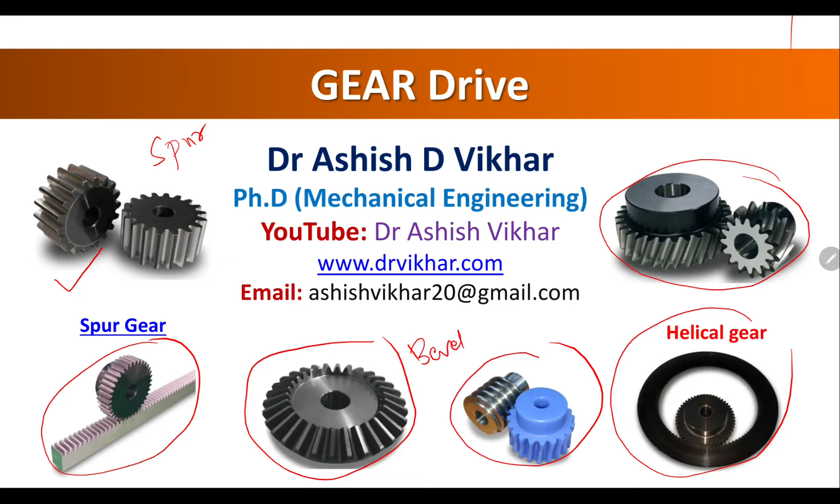Here you will see a bevel gear. After that, this is a worm and worm wheel. After that, here is an internal helical gear, and these are the helical gears. So this way there are various types of gears available, and all these gears are used in power transmission.

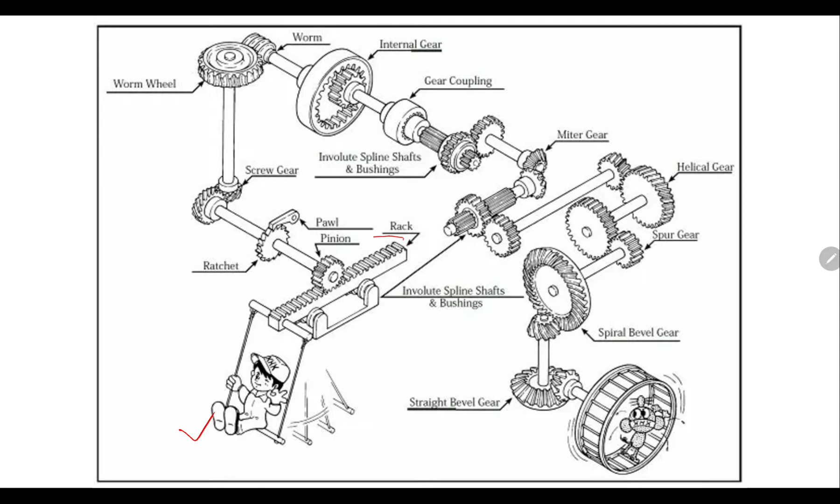This is a very important picture. You will see the applications of various types of gears in one place. As you can see here, this small child is on the cradle, a baby swing, and that is attached to the first type of gear here, which is called a rack and pinion gear. The power from that is transmitted to another mechanism called the ratchet pawl mechanism.

Further, you will see an application of screw gear. After that, the power is given to the worm and worm wheel. Through the internal gears, that power is given to the gear coupling, through gear coupling to involute spline shafts and bushings, and from that place it is given to the miter type of gear.

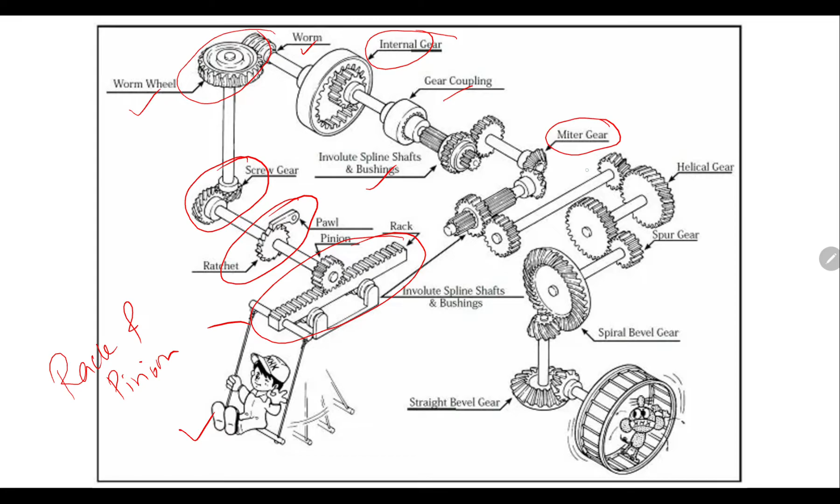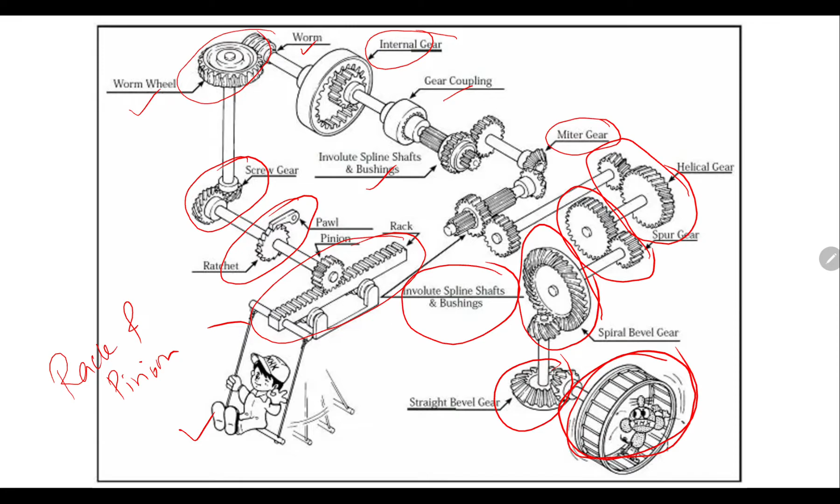From the miter gear you will see again the power is given to the involute spline shaft and bushings, and from that there is an application of helical gear. Then the power is given to the spur gear. Then you will see spiral bevel gears and straight bevel gears, and finally at the end you will see the power is reached. So this is a very beautiful figure which explains the applications of different kinds of gears.

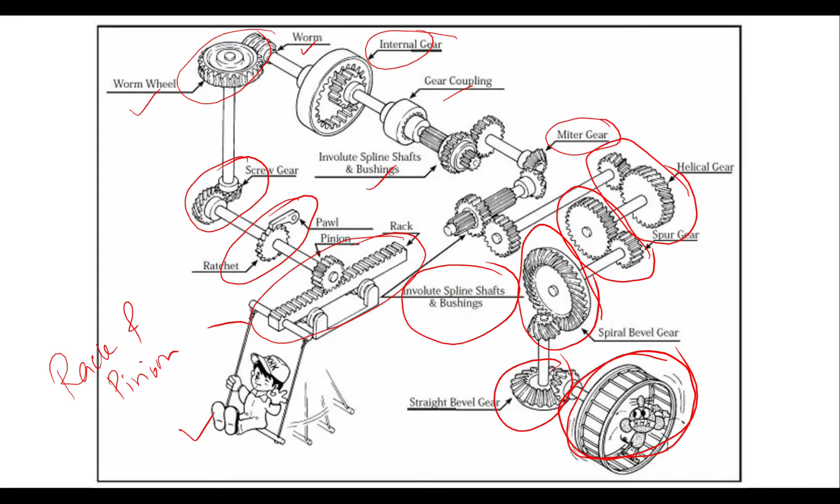We have to understand how the gears rotate, how is the structure, how is the appearance of such types of gears, that we are going to learn in this unit. But let us see what are the contents of this chapter number 4 of theory of machines, which is based on the gear drive. First we will see introduction to gear drives.

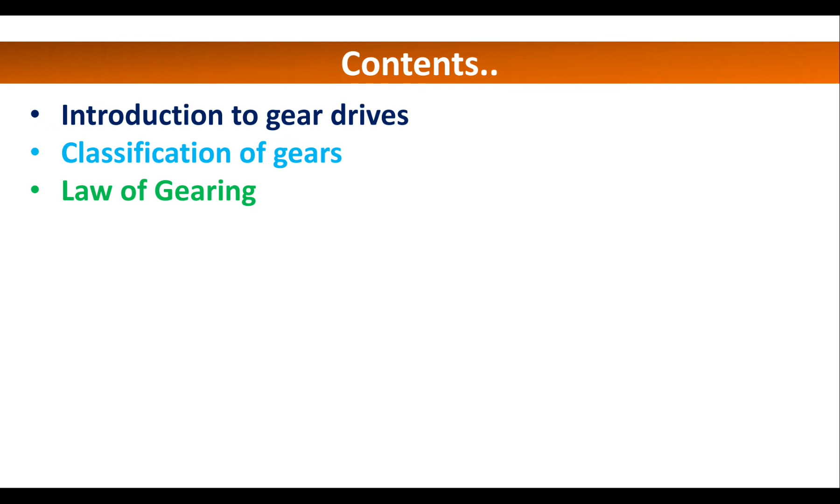After that we will learn about classification of the gears. Next we will learn what is the law of gearing. This is a very important law in case of gear drives. After that we will learn gear terminology. Then what are the types of gear trains, the different types of gear trains.

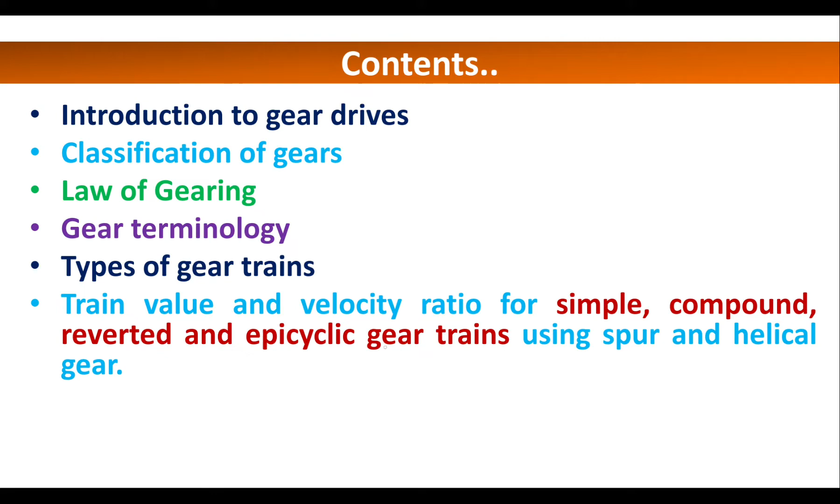Then we will learn about train value and velocity ratio for simple, compound, reverted and epicyclic gear trains. First is simple gear train, second is compound gear train, then third is reverted gear train, and last one epicyclic gear train. Then how to determine the velocity ratio regarding all these types of gear trains, using spur and helical types of gears. So that we are going to learn in this chapter number 4.

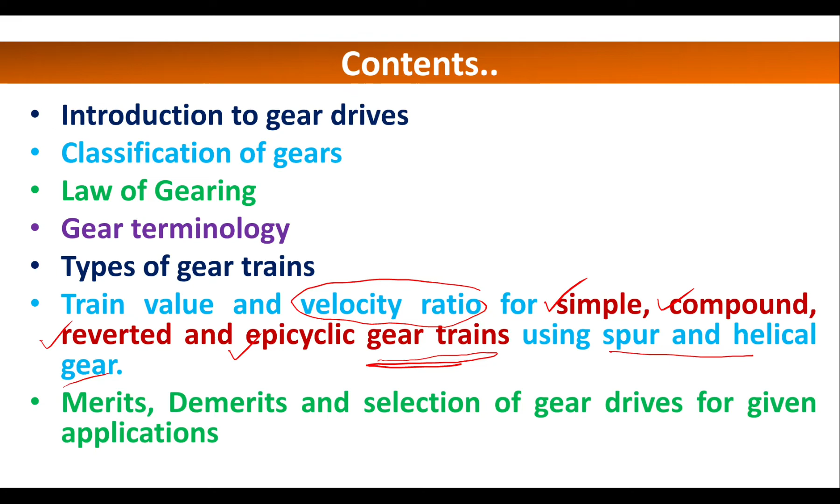After that we will learn about the merits, demerits and selection of gear drives for the given applications. So these are the total contents that we are going to learn in chapter number 4, but particularly in this lecture we will only learn about introduction to gear drives. So what is meant by gear drives?

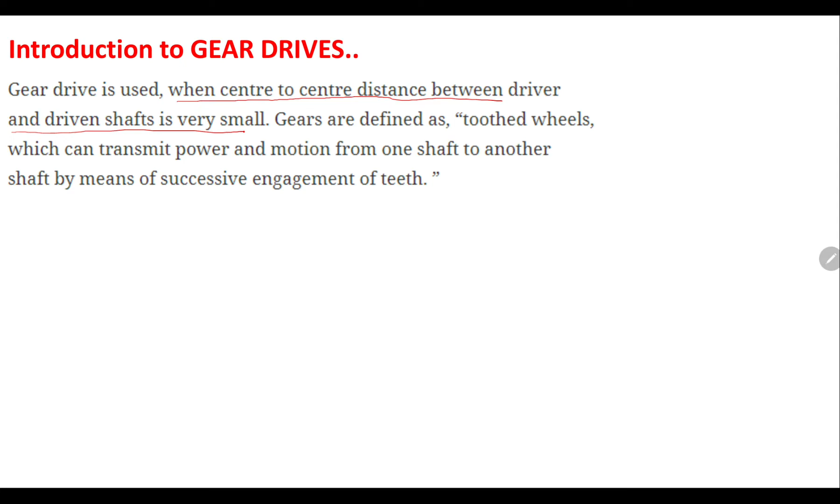Gear drive is used when the center to center distance between the driver and the driven shaft is very small. So when the center to center distance between the driver and driven shaft is very small, we can implement gear drives. Suppose these are the two shafts, shaft number 1 and shaft number 2. Between that, if this horizontal distance x is very small, then in that particular category we can use gear drives.

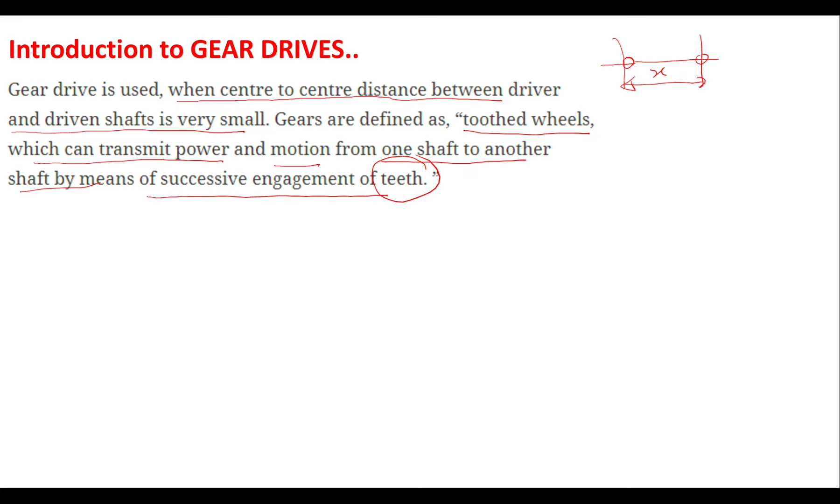Gears are defined as toothed wheels which can transmit power and motion or speed from one shaft to another shaft by means of successive engagement of teeth. So teeth are used in case of gear drives. So in this way we can define the gear drive: a toothed wheel which can transmit power and motion from one shaft to another shaft by means of successive engagement of teeth.

Here you will see the picture of a gear drive, specifically the spur type of gear. The first shaft is at the upper side and the second shaft is at the lower side. At the lower side there is a gear which has different teeth, and these teeth are meshed with the pinion type of gear which is smaller in size. So the pinion teeth are engaged with the gear teeth, and this shows one of the types of gear called a spur gear.

This is a side view. Here you will see the pinion shaft and the gear shaft. The gear is mounted on the gear shaft, and the pinion is mounted on the pinion shaft. This is the sketch of a gear drive.

In this figure you will note that both gears which are engaged always rotate in opposite directions. This is very important. If this gear is rotating in the anti-clockwise direction, then the motion of the pinion is in the clockwise direction. It clearly shows that the motion of the pinion is clockwise while the gear is moving anti-clockwise. So gear drives consist of two wheels.

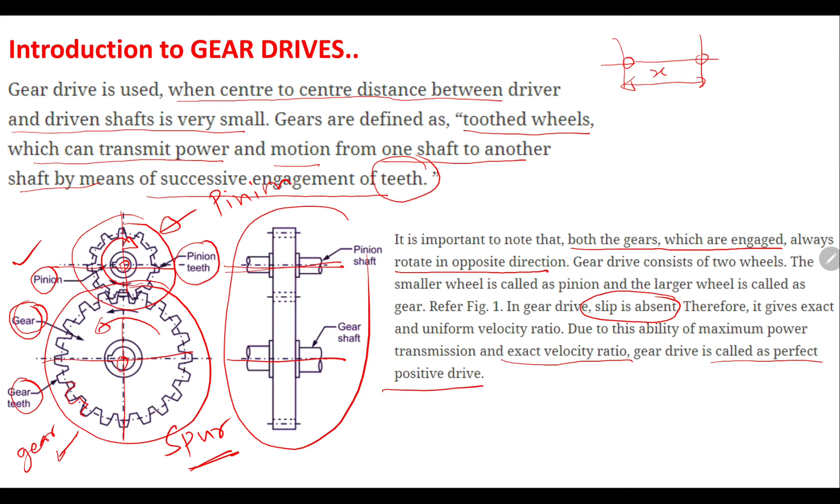Because of this, gears have various advantages. So what are these advantages? Gear provides exact velocity ratio, it gives very high efficiency, and the layout of the gear drive is very compact. It has the ability of transmitting larger power, maximum power can be transmitted, and it gives very reliable service. These are a few advantages of gear drives.

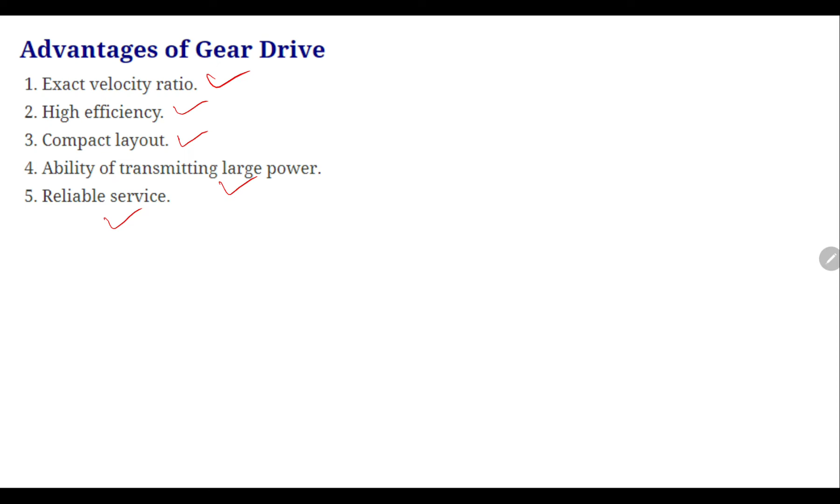Gears also have certain disadvantages. The first disadvantage is that manufacturing of gears requires special tools and equipment, which leads to high production cost. After that, there is a complicated manufacturing process to manufacture the gear drive. Also, the gear drive requires precise alignment of the shaft.

After that, a costly lubrication system is required for smooth operation and longer life of the gear teeth. Lubrication is needed, and it is again very costly, needed for the smooth operation and longer life of the gear teeth. Any error induced in the gear during the process of teeth cutting leads to noisy operation with severe vibrations.

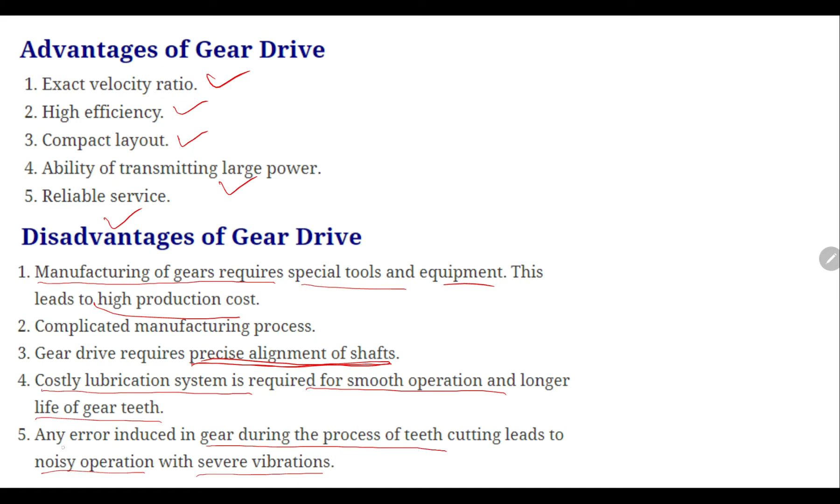See, severe vibrations are produced and there is noisy operation when any gear during the process is going to cut. So if there is an error, then it gives very noisy operation and severe vibrations.

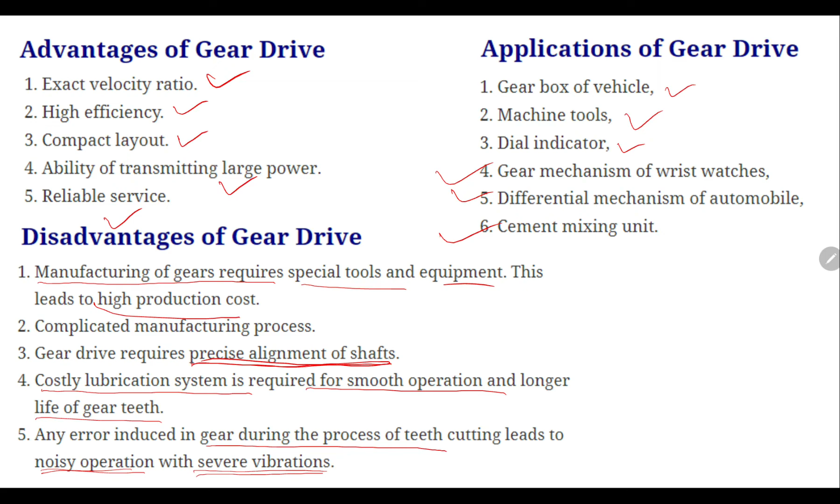What are the applications of gear drive? Let us see one by one. Gear drives are used in the gearbox of the vehicle, in machine tools, in dial indicators, the gear mechanism of wrist watches, the differential mechanism of automobiles, and cement mixing units. So these are a few examples where we can use gear drives.

Now let us compare between the gear drive and the belt drive. In the last lecture we have seen the details regarding the belt drive. Now on the basis of some basic factors we can compare between gear drive and belt drive. First is space. Gear drive requires less space compared to the belt drive, while belt drive requires more space compared to the gear drive. Second parameter is friction loss.

There is low friction loss in gear drive as compared to the belt drive. Therefore power transmission efficiency is high, but belt drive has high friction loss, therefore belt drives have lower transmission efficiency. Gear drive requires less maintenance, but maintenance cost is relatively cumbersome, while belt drive requires high inspection and maintenance cost, and it is cheaper and convenient.

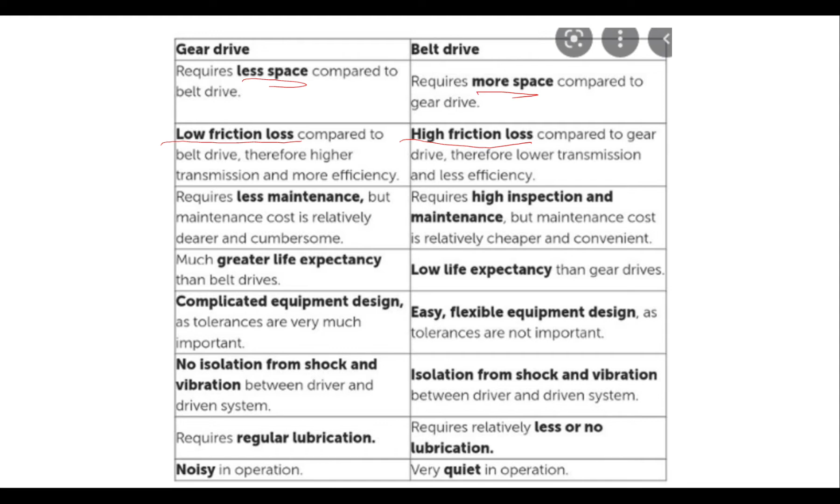In case of gear drive much greater life expectancy is there, but in belt drive low life expectancy is there. Complicated equipment design and tolerances are very important in gear drive, but belt drive has easy, flexible equipment design, as tolerances are not important. Gear drive has no isolation from shock and vibration, while in belt drive isolation from shock and vibration between driver and driven system exists.

Gear drive requires regular lubrication, belt drive requires relatively less or no lubrication. Another disadvantage is that gear drive is noisy in operation and belt drive is very quiet in operation. In this way we can differentiate between gear drive and belt drive.

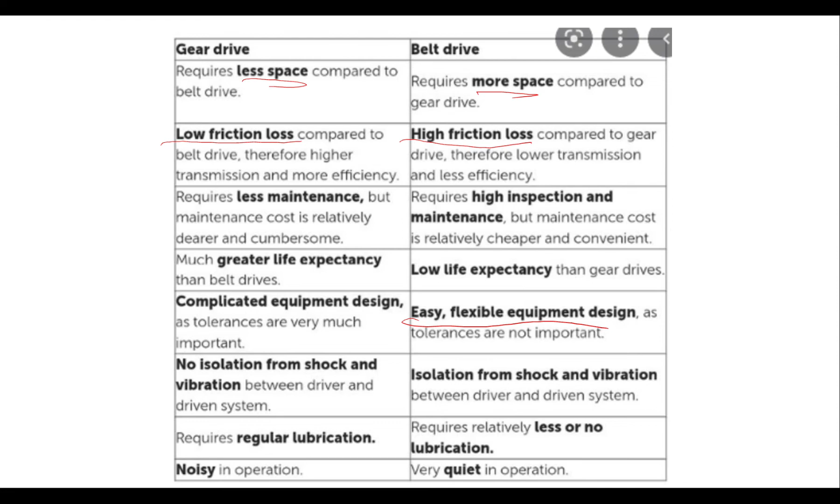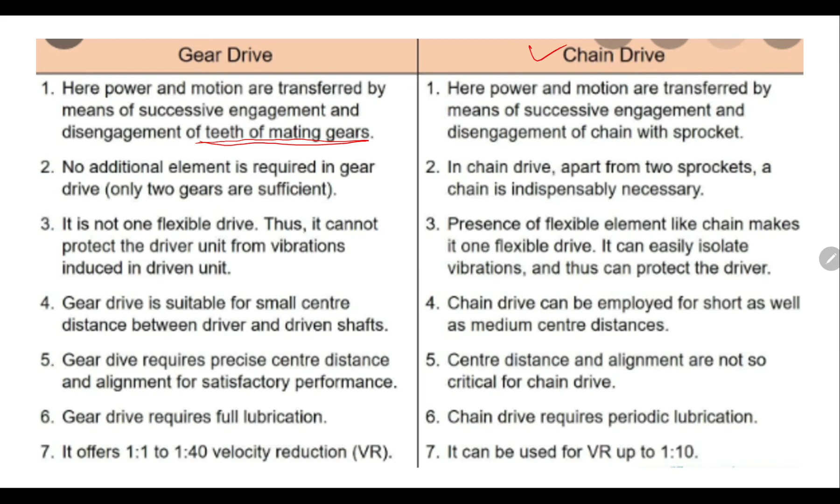After seeing the difference between gear drive and belt drive, let us see the difference between gear drive and chain drive. In the last few lectures we have seen details regarding the chain drive. In gear drive, power and motion are transmitted by means of successive engagement and disengagement of teeth of mating gears, but in chain drive power and motion are transferred by means of successive engagement and disengagement of chain. There is a use of chain with a sprocket.

So chain and sprockets are used in chain drive, but in gear drives teeth of mating gears are used. In gear drive no additional element is required; only two gears are sufficient for power transmission. But in chain drive, apart from two sprockets a chain is indispensably necessary. Gear drive is not a flexible drive, thus it cannot protect the driver unit from vibrations induced in the driven unit.

But in chain drive the presence of a flexible element like the chain makes it a flexible drive. It can easily isolate vibrations and thus can protect the driver. Gear drive is suitable for small center distance between the driver and driven shaft, but chain drive can be employed for short as well as medium center distances. Gear drive requires precise center distance and alignment, while these are not so critical for chain drive. Gear drive requires full lubrication, while chain drive requires periodic lubrication.

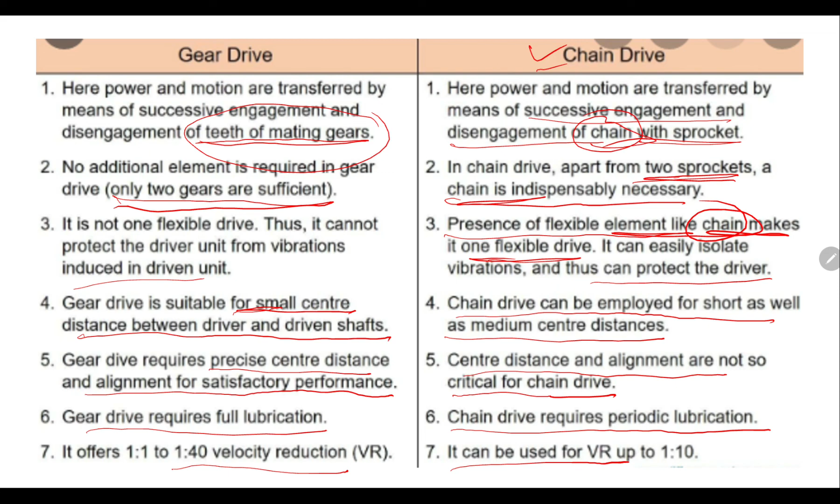Gear drive offers 1:1 to 1:40 velocity ratio. Chain drive can be used for a velocity reduction up to 1:10. In this way we can differentiate between the gear drive and the chain drive.